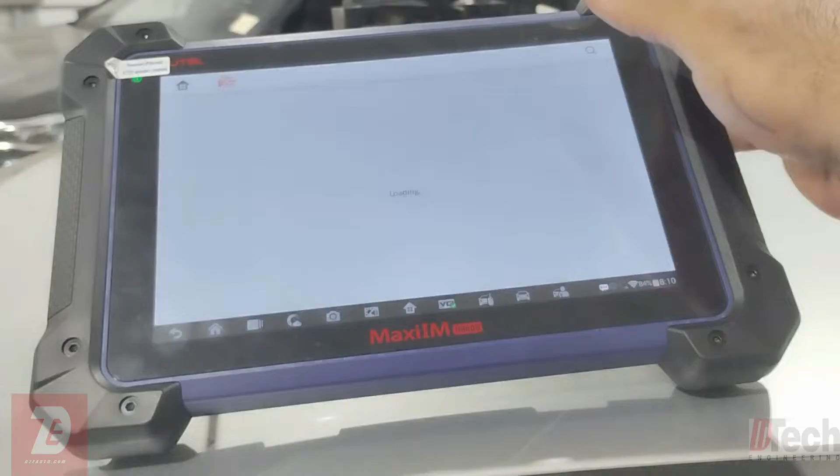Okay, so I'll get you guys going. First things first, I did have to install a brand new battery because, as always, they bring you cars with electrical problems with a dead battery. So we'll start with scanning it, but actually, let me show you exactly what it does. So here's the new fob. It looks pretty legit. Doesn't look, let's call it counterfeit.

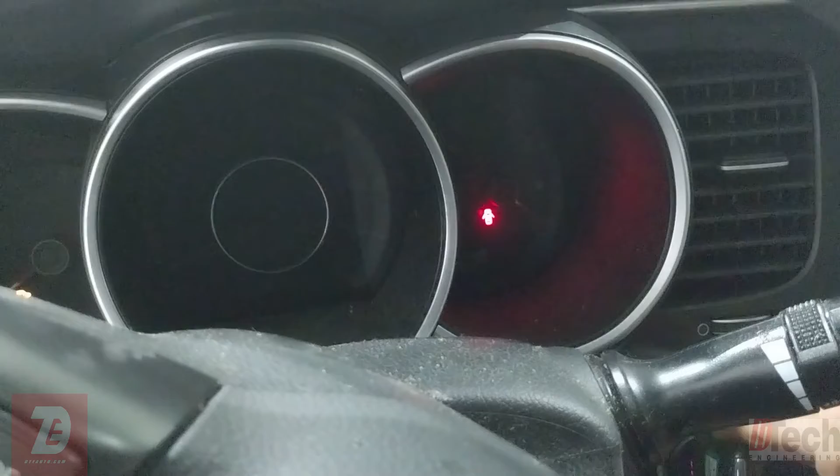And then if I push the button, it'll tell you, so it says key not detected, and obviously we see immobilizer light. Keep pressing, nothing. Again, press start button with key, nothing. If I take the remote and put it there, I'm able to go through the key on procedure. And then if I try to crank it, nothing. It just turns off as if we're requesting to turn off.

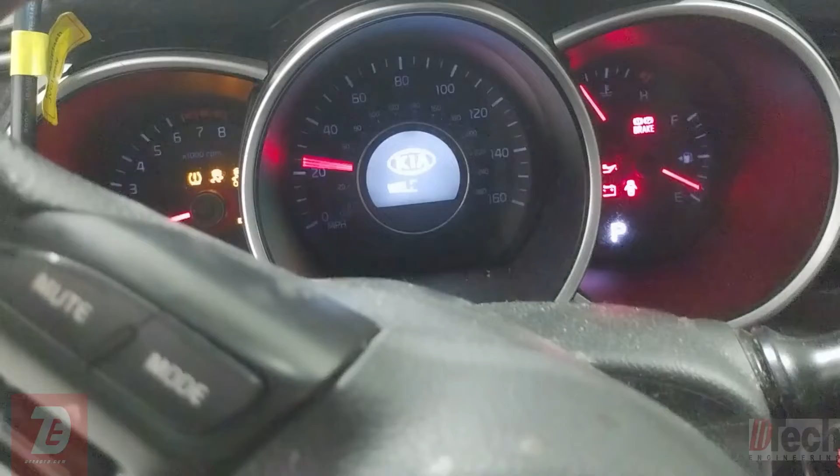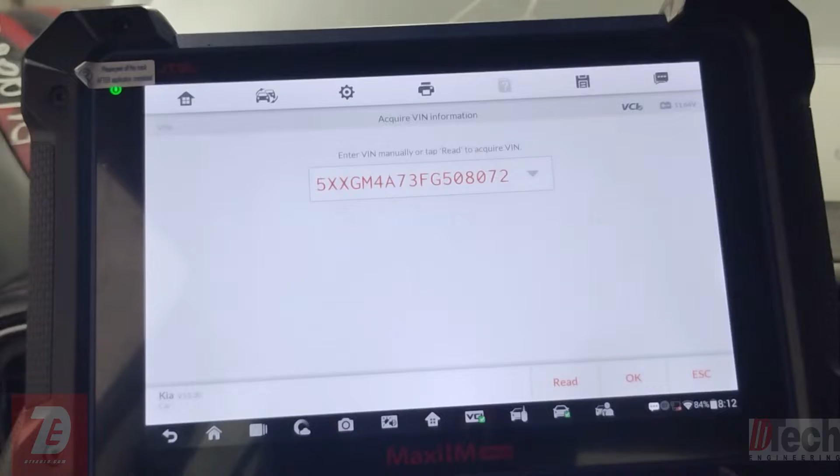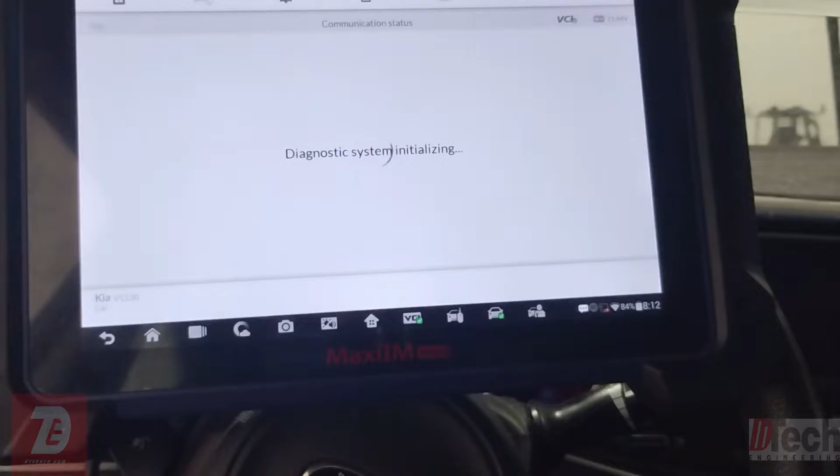So let me get this powered up again. There. And I'll do a system scan. Automatic selection, we hit read. And it is actually the correct VIN. Trust me on that. So it can identify the vehicle, all while still just keyed on, like a normal situation. It just doesn't crank. Diagnosis, and I'm going to do complete scan. That way we can hit all the relevant modules.

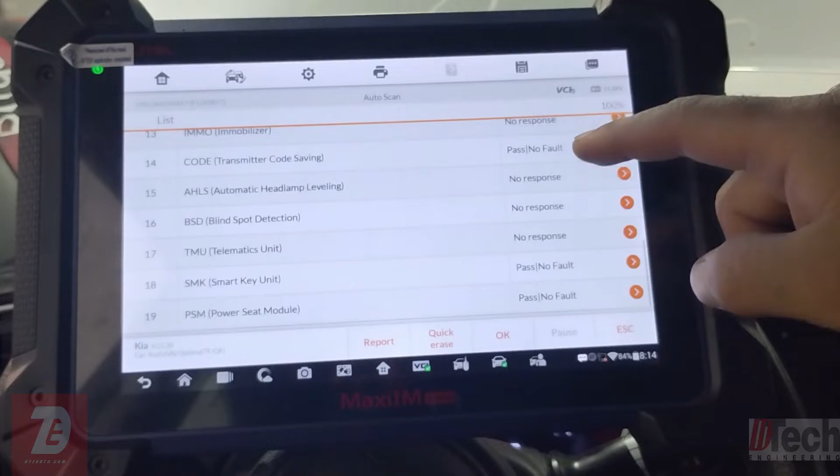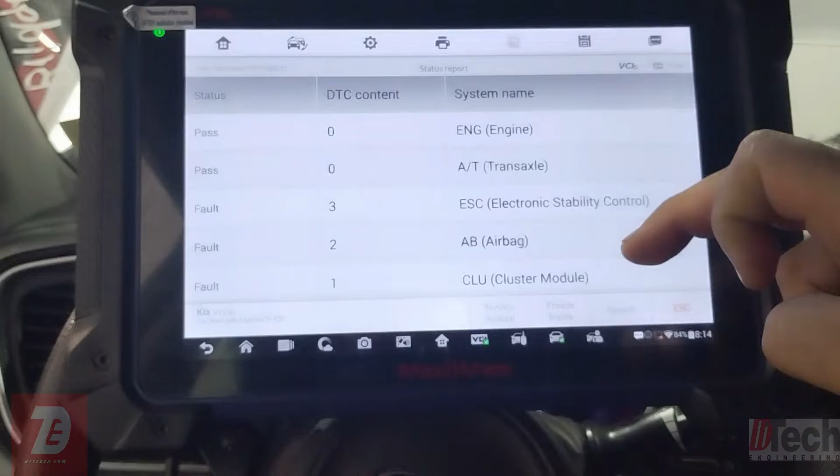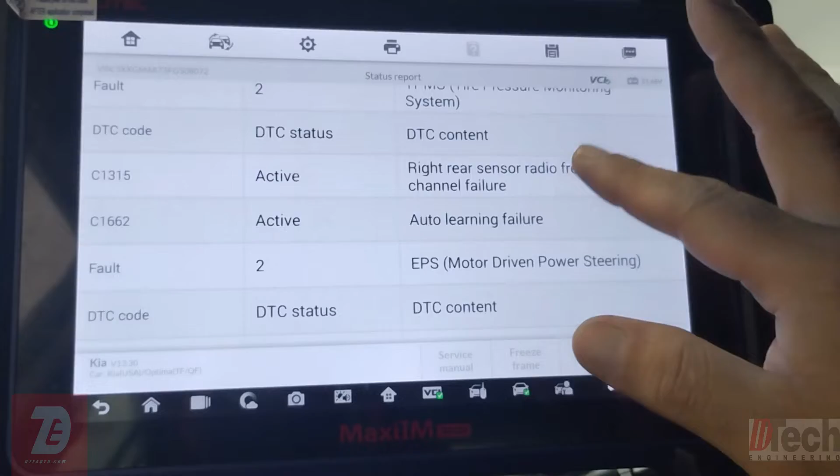All right, so we have completed the whole system scan. Let's see. Here it's telling us immobilizer, no response. Body control module, no fault. Engine, no fault. Let's see the report. So pressure sensor, engine management, history. Got a couple CAN communication faults, but they're not active. Let's see, tire pressure. All right. Nothing here that we see that's relevant other than this immobilizer stating it's not responding.

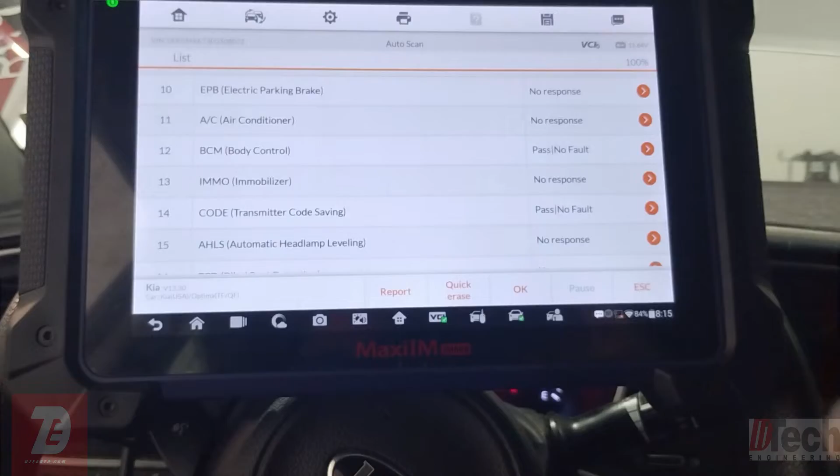And since I've already dove into this about a month ago, that is a module that is not installed in this vehicle, because right away I went searching with that, because clearly that is going to keep us from starting the vehicle if we have no immobilizer communication. But in this case, trust me, there is no immobilizer.

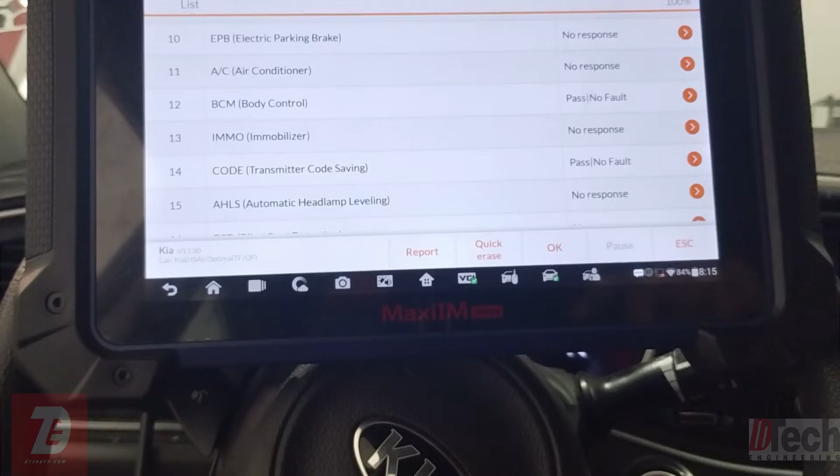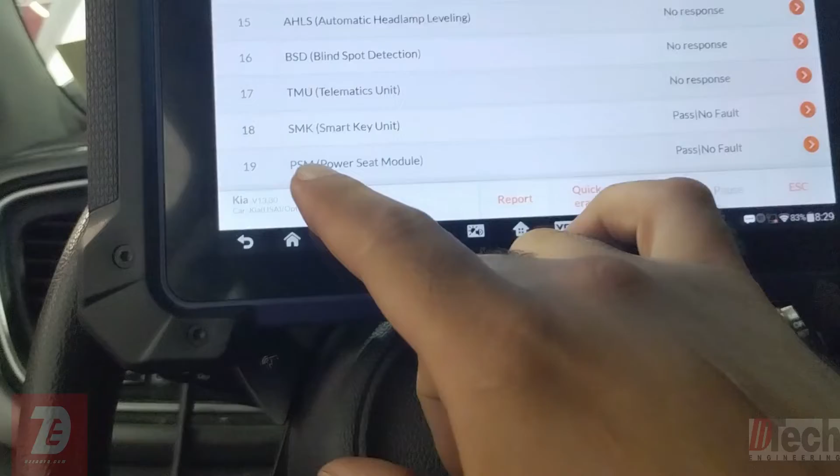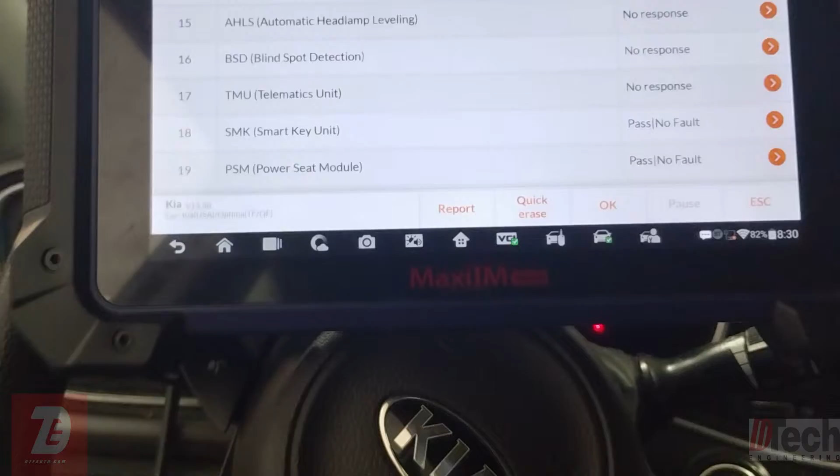Okay, and then so after thinking I had an aha moment with this whole immobilizer not responding, after researching for a bit, I found out that for this smart key fob system, the major player or master is this smart key unit, which, first of all, we do have. Second, we have no faults in it, which starts to get odd because all of our problems are a no key detected situation, and that is the guy that would tattletale any sort of problem with the key. So let's get back to where I was.

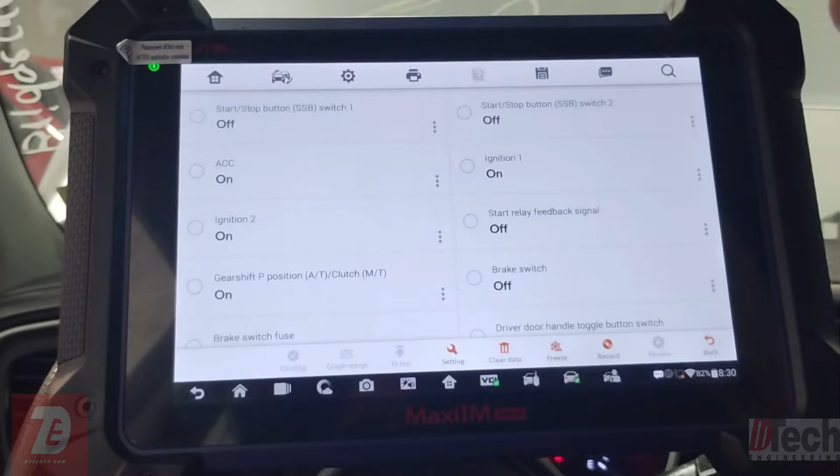Okay, we are powered up and we will look at basically live data. That's where I went next after finding out that is one of the masters. And here we go. So being this is first time dealing with one of these, I am not 100% sure what I am looking for or even what I'm looking at for some of the things. Some are straightforward, but trying to look for something that would jump out.

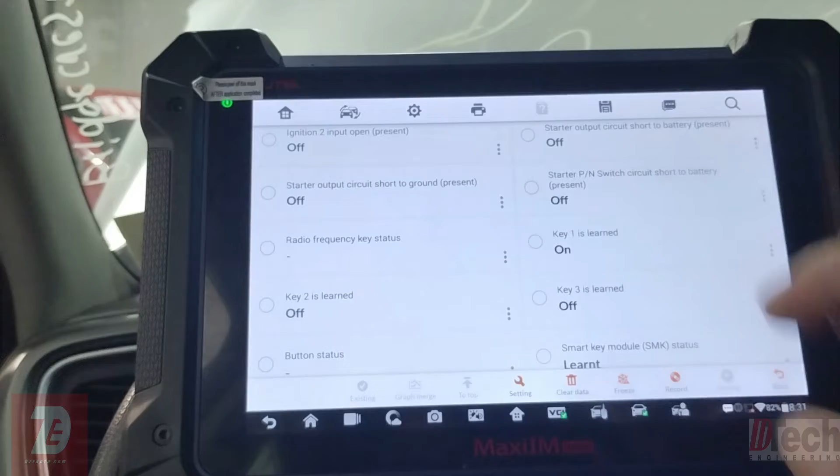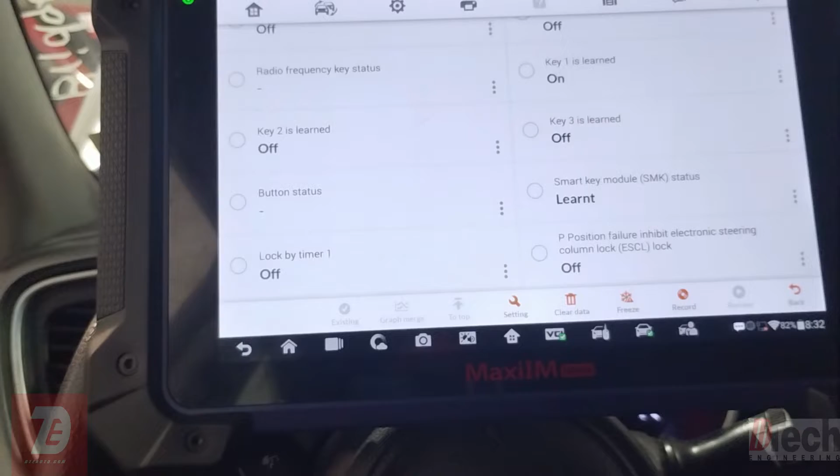And then so I finally get to something that looks to be related with keys. And so that's blank as far as frequency key status. Not sure what's supposed to be there. It does say key 1 is learned. Key 2 looks like it's not. Same with 3. Let's see, button status, blank. Smart key module status, it says it's in a learnt mode. Number of learnt keys, 1.

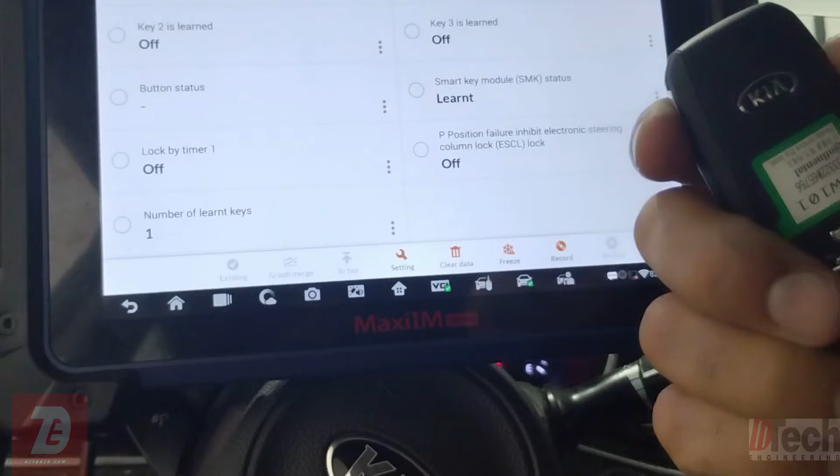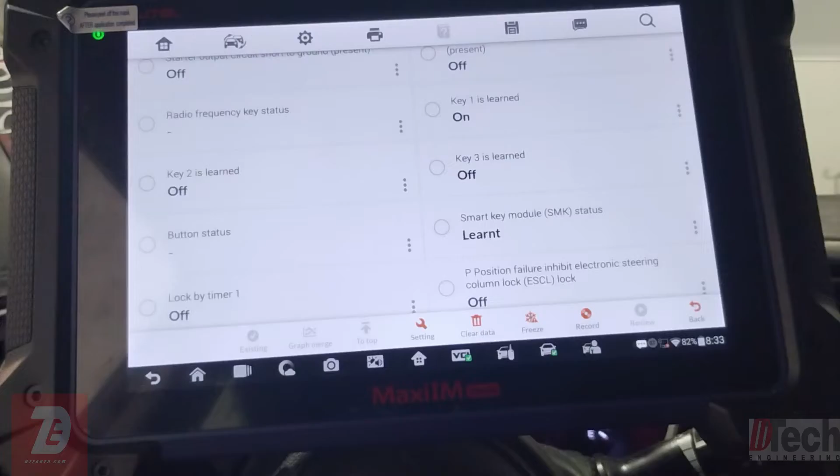Now, I don't know if this is the learnt key, if this is key number 1. But according to just those data PIDs, it again was getting puzzling, because this one you would think would show some sort of problem if we're having, let's call it immobilizer type of issues. And then I'm assuming these two PIDs are related to when you hit this. And you actually could see the light blinking and no status change there.

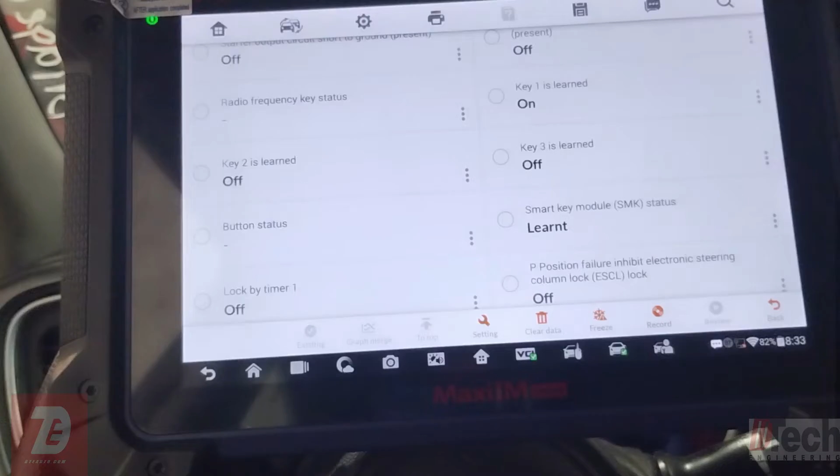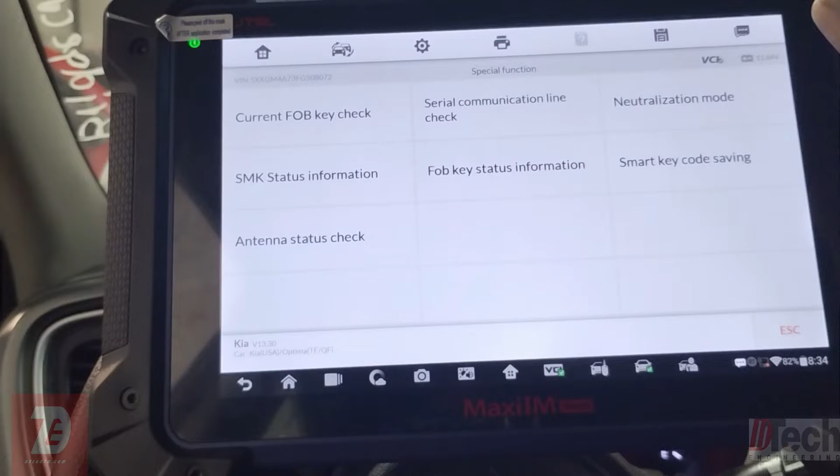And so I'm starting to get lost and not knowing what's going on. And if I back out, let's see. So, let's look at this. Let's see.

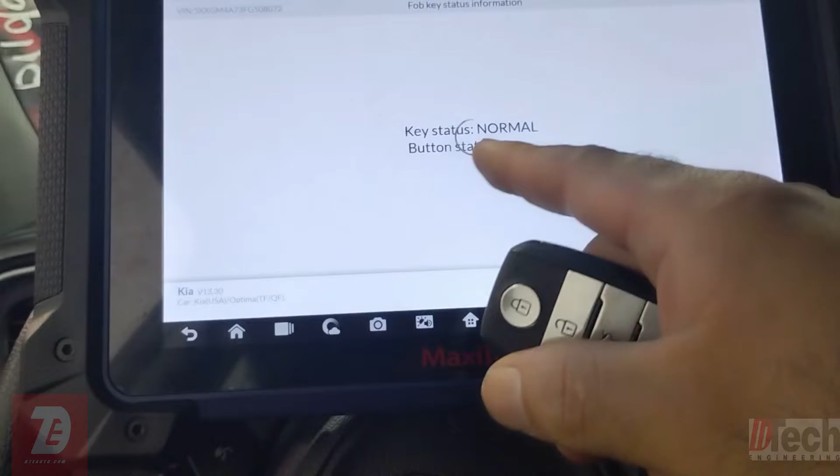So it's saying the status normal. Let's see. It's not seeing any button status. I'm assuming that's what it's asking for. Okay, so we see that seems to have not been good, or obviously it's displaying a failure. At this point, I still don't know exactly what that is referring to.

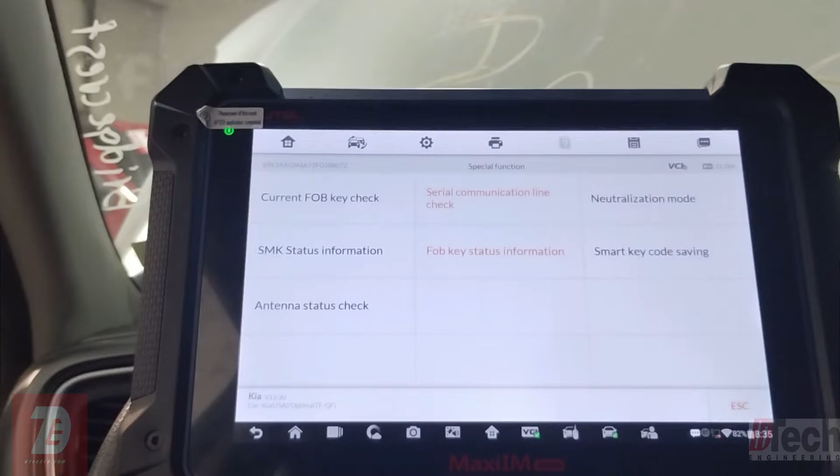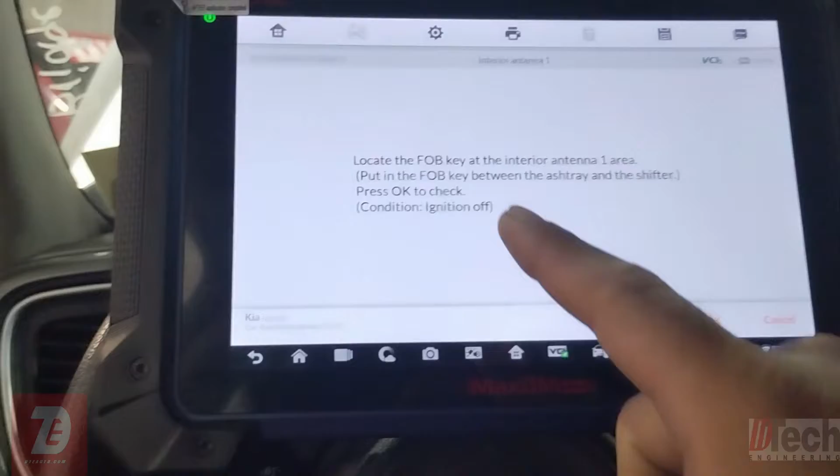One thing that I did see was this. Let's see. We'll do this. So it tells you, put it right here by the shifter, ignition off, which it is. And okay, so another failure. And so those things are just all kind of relating to what the error message on the dash says, that it's not seeing the key.

Now, is it not seeing the key because this just wasn't even programmed, even though it is a brand new key? Did someone just get in here and attempt to program it, never go through, and leave this fob in here when the car got sold? Or is it programmed some way, somehow? Not sure how. If it can't even be detected, how you'd be able to program it unless there's a different way. I'm not sure because I've obviously not done any keys on one of these, so I don't know if this one's programmed or if it's just a blank and why we're not seeing it.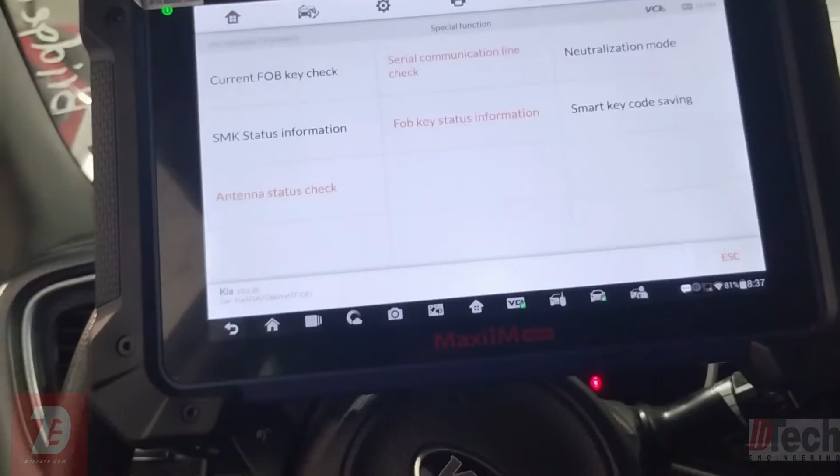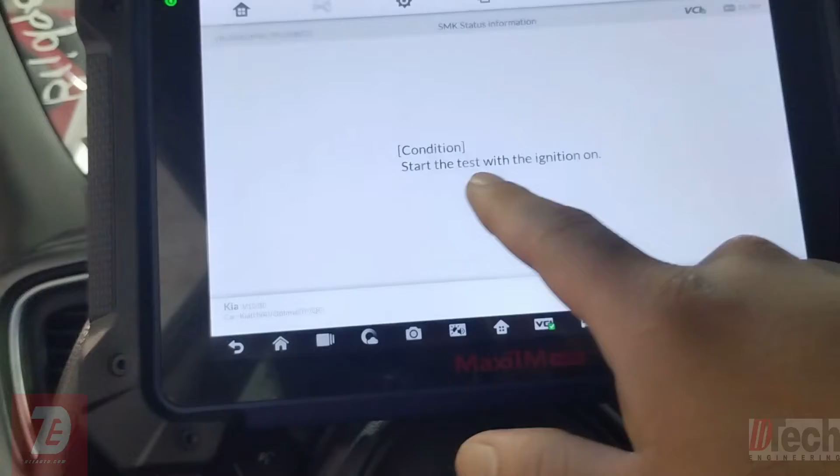And then, one last thing I could check. So that's a SMK, which is the smart key module. So ignition on. And one thing I've noticed, I have to put this in up against that for it to, looks like it can at least see it that way. So there's something in here that is able to sort of communicate with this. So that's confusing in a way.

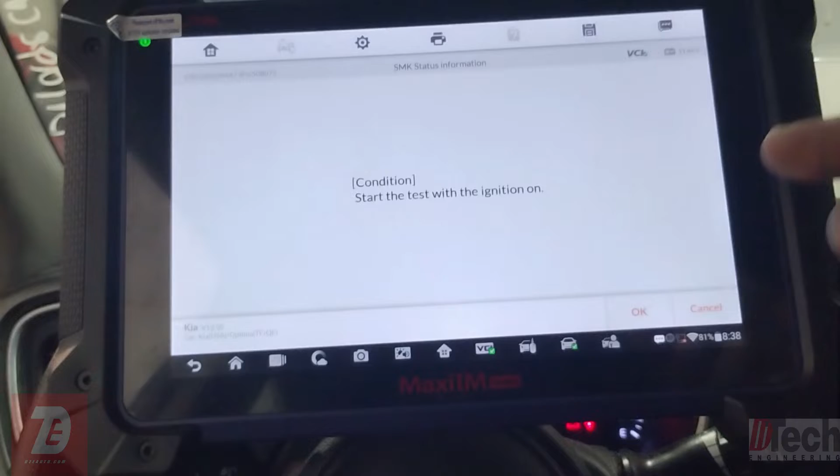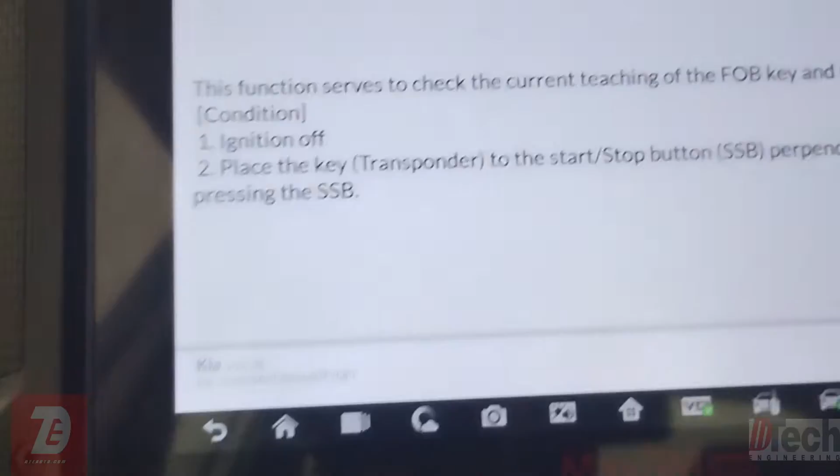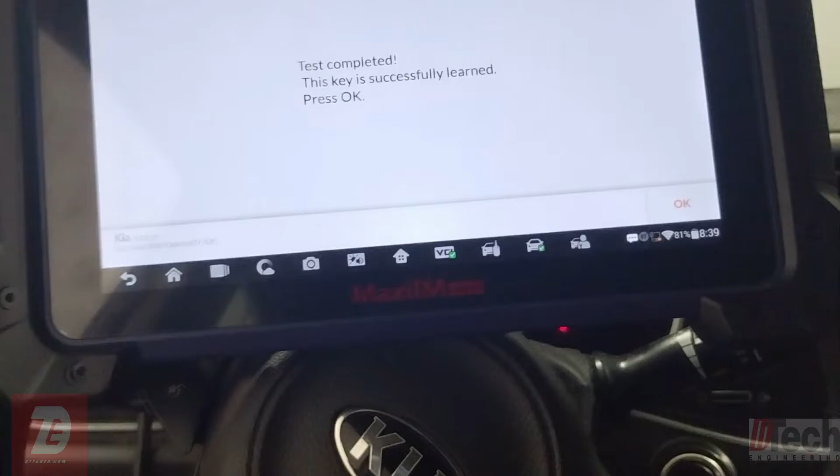Supposedly, this test we just ran, where I put this on the push button, supposedly tells us that this is learned. So if this is learned, and the status tells us that there is a learned key, and this test here supposedly sees that it's learned, why can't we start the car? Again, I can press, my foot is on the brake. And nothing, no start, even if this is supposedly a learned key.

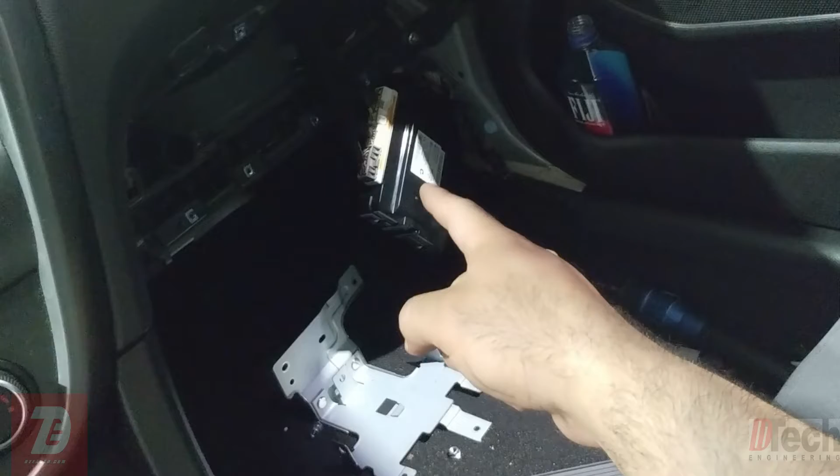And so this guy, that is the SMK, the main controller with the system for the key. And I'm beginning to fear that that is probably a possibility of what's wrong. And why I say fear is because I don't know what's going to be involved with doing a, let's call it a used one at first. Not sure if a new one can be purchased or available, so on and so forth. So I don't know if I'll even have the tooling to do a used one or what would be involved. So at this point, I decided to do some more research, and I'll show you what I found.

Now, if you remember, when I was doing the active test and looking at the data on the scanner, I think it was 2 tests that basically came back with a failure result. One of them was the communication line. The other was the antenna test. So those 2 are starting to tie into something basically similar.

The third thing that I keep noticing is anytime you push a button, there's no status change of seeing or recognizing any buttons. So basically, I think what we are dealing with is not an actual key problem. It seems that the key is properly learned, but we are literally dealing with what the dash is saying, and that is that it cannot see the key. So now what we have to figure out is why the vehicle can't see the wireless radio frequency communication from the smart key fob.

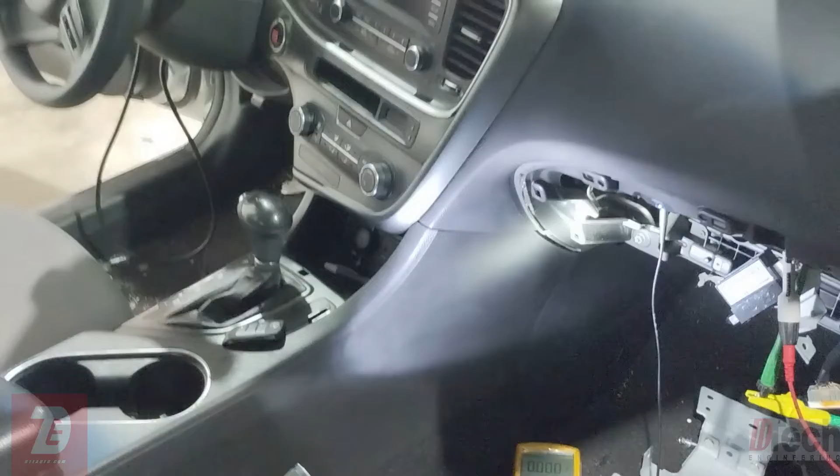Okay, so I've gained access to the antenna module there, and I am monitoring power, ground, and the signal. And right now, key is off. And just to check and see what levels we have. So the red is the voltage on the ground. I just wanted to make sure nothing crazy was there. That's down at 0. The blue is the power feed. That's up to near 12. And the green is the signal line. That's in the high 11. So I'm going to key it up and see if that changes. Let's see.

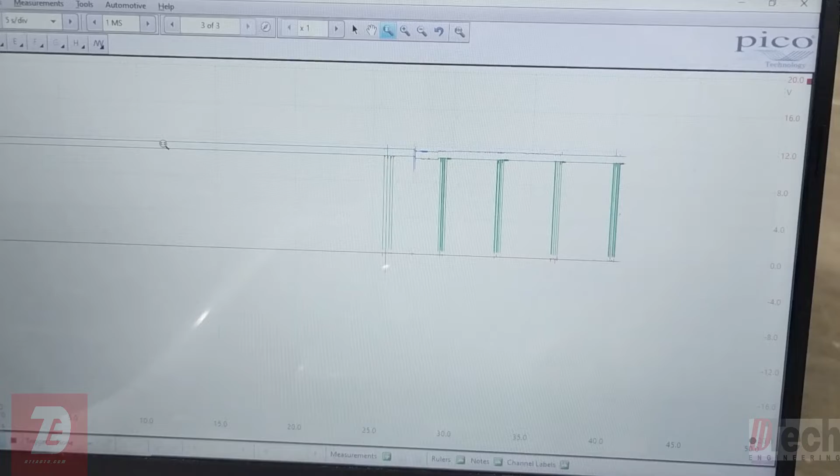Okay. Key is up, and we are getting signal activity on the communication signal line. So that's very repetitive. But I don't know necessarily what's supposed to be there.

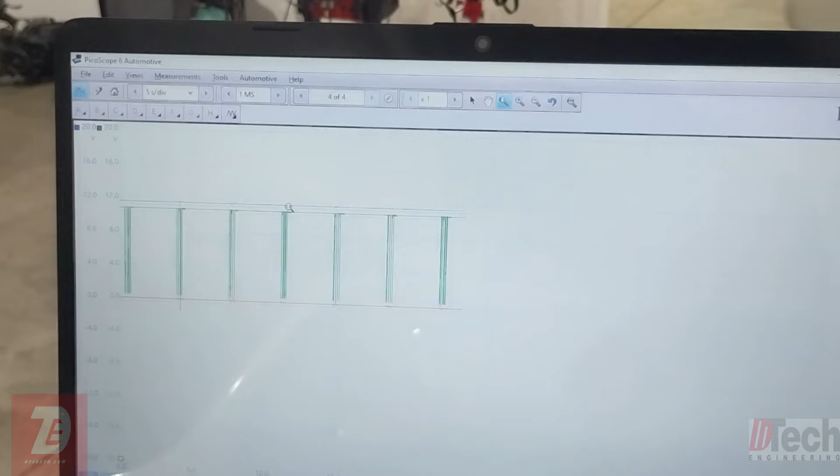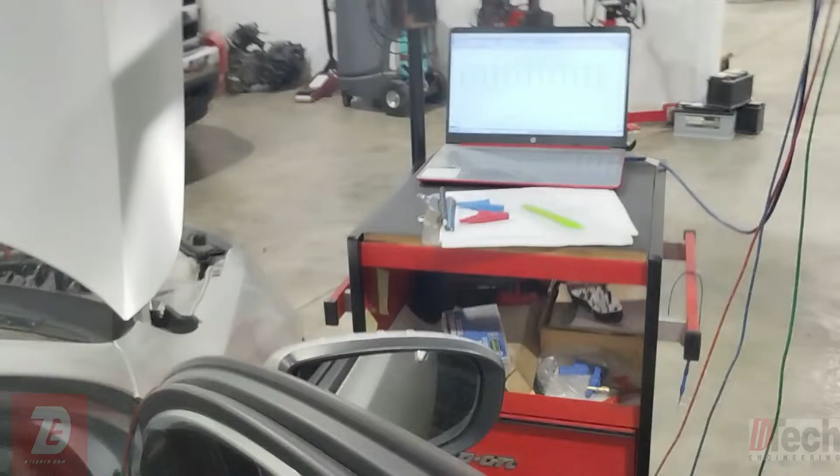If that's a communication that occurs constantly between the SMK and the RF, or if it's supposed to be stagnant and then only show activity when there is communication from sending or receiving radio frequency. Based off that, let me see if hitting the button does anything different. So let's see. Nothing different. Nothing.

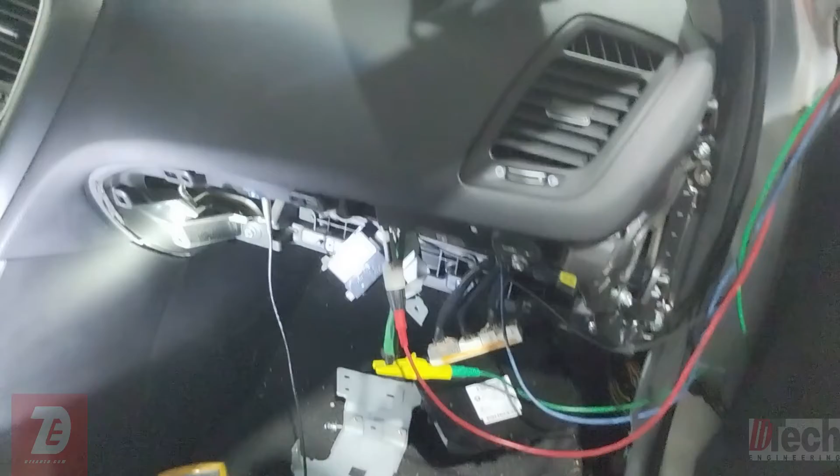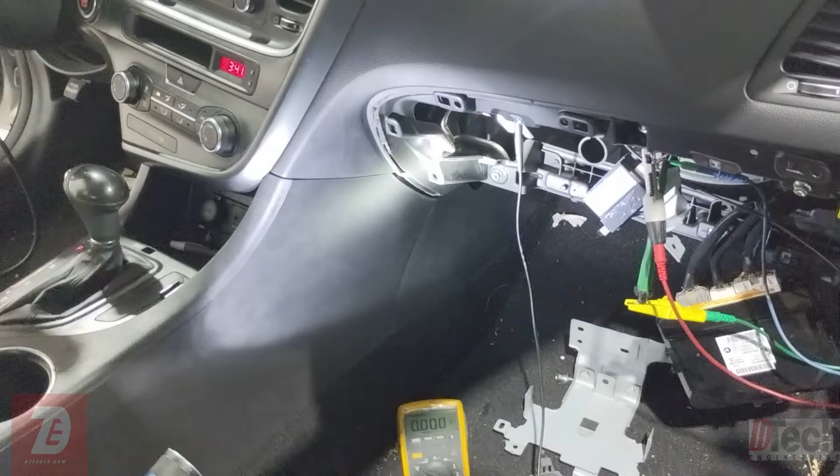So I don't know what's supposed to be there on that communication line, but I am theorizing that this receiver is not working, that the whole vehicle, that main module, everything is not seeing the response from the key fob, and it's not seeing it because I believe that guy is non-responsive. Based off everything that I've been reading and just experience with other vehicles, systems like this, and kind of a gut feeling, I'm narrowing down to that, but I need a way to prove it out.

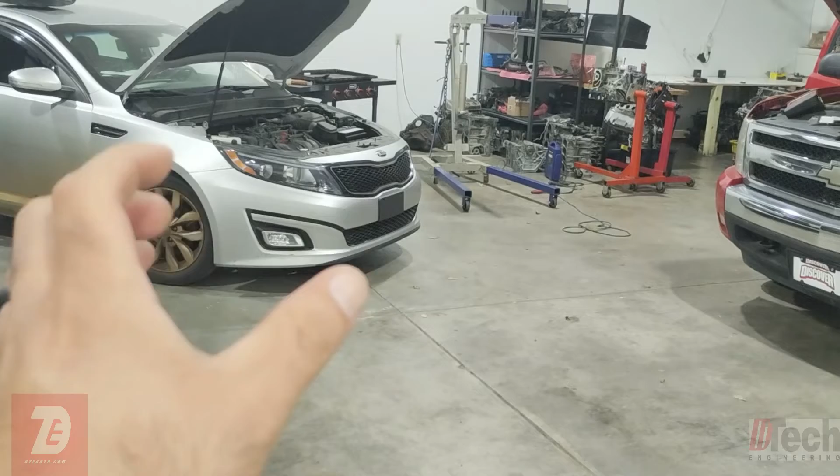Okay guys, so I finally got lucky. It's been a while since I actually messed around with this one because part of the problem was trying to wait for one that had the same start system, basically a bladeless key, one of those remote hands-free type of key system in the same general year range to be able to do back-to-back testing. So here I am with that.

I am connecting the scope to the same antenna. So this is actually a 13, but I checked the wiring and the system, and everything is pretty much similar. That signal does go to a different pin on the main SMK module, the smart key module, but it still nonetheless is the same antenna setup, and the concept and operation is the same. I did read both vehicles' description and operation for the system, and it was the same.

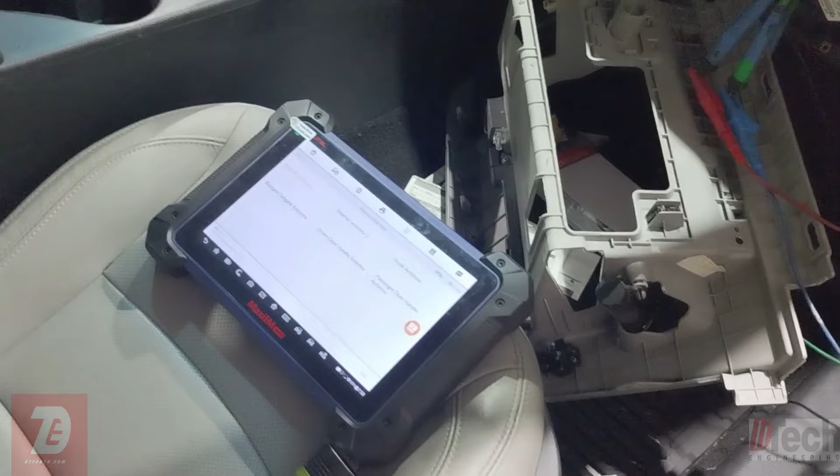So the one thing I want to try that has made me think that the problem is the receiver, is to do the test of detecting the key with interior antennas. So you can see that one that I've got highlighted. That's the one with the antenna up there up front. As far as what I am monitoring, channel A in blue is the power supply. Red is the voltage on the ground. And then green, I am monitoring the signal line that goes back to the smart key module.

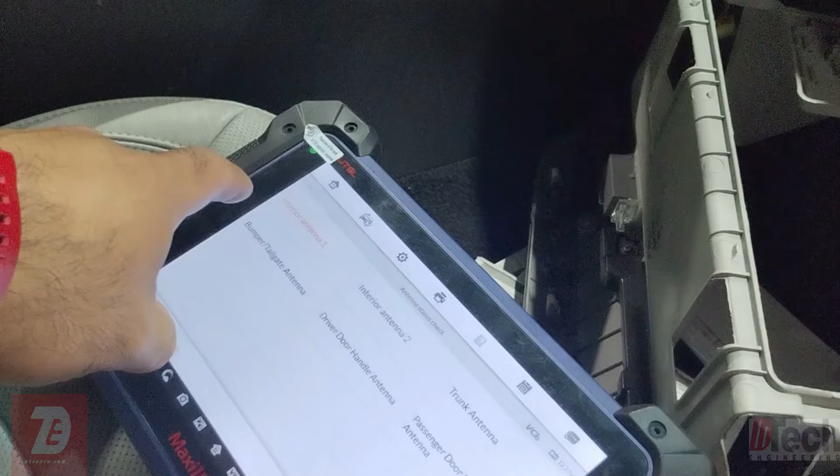So I am expecting to see some sort of activity on the green channel when we request the antenna to find the key. So we'll do that. And we'll quickly take a look there. It's all flatline. We'll hit OK. And it passed, and look at that. We have activity on the green signal line.

Okay, so now we see a difference between this known good vehicle, which works right and is properly starting with the wireless remote, and we see a difference in that communication line, that it stays constant up high, and there's only activity when there is radio frequency being transmitted when we did that antenna test. So that is one more step in helping prove out that we have some sort of issue on that communication line. And I believe that it's just a dead RF antenna not receiving things and sending it down. And I think that constant pinging that we saw in the bad car is just the SMK reaching out because it's not seeing the RF antenna.

And just to further prove it out, I'm going to move that RF antenna into this vehicle and see if this one now does not see the key. Okay, so here's the bad one. I've marked it with an X. I haven't installed it yet, but I got the scope back on here. There is our scope running, all same channels.

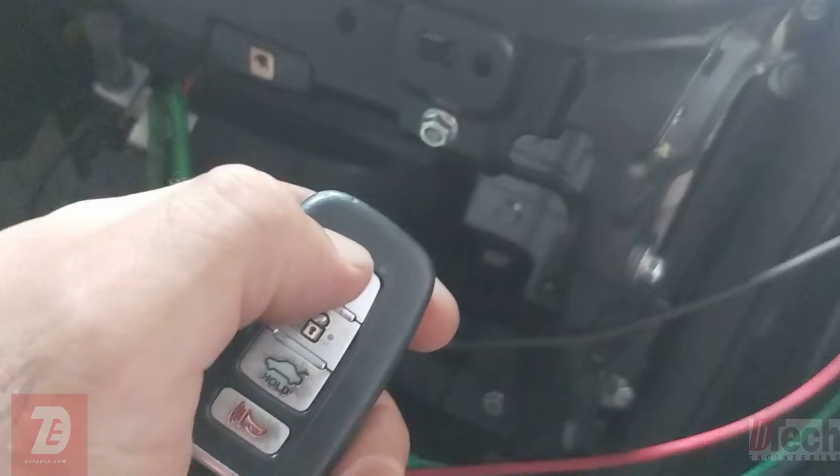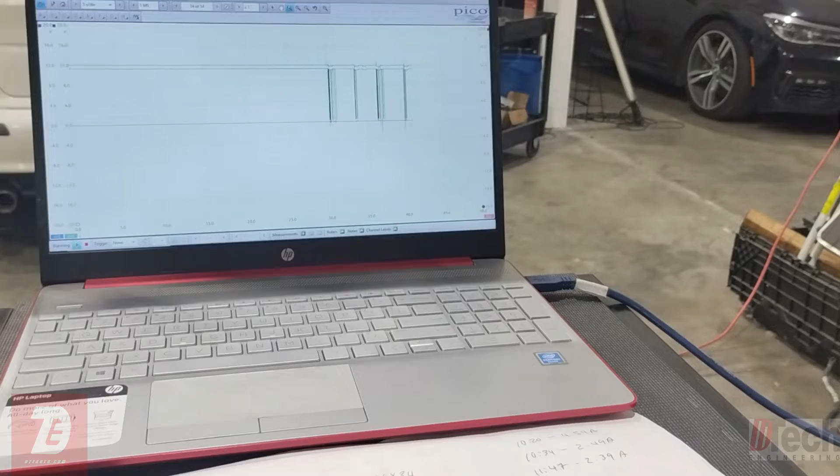I wanted to show you if I hit the button, we should get activity on that signal line because this will receive the message from this and it'll react and send it down. So let's see if we can capture this. Let's hit. There we go. Look. So let's unlock it. There we go. So that is what a known good should look like. Kind of like what I was hoping to see. It's similar to the BMWs I've done.

So this is a receiver of radio frequency from the remote. And it also, as we saw, receives it from all the antennas. So the antennas get current from the main module. It's an inductive current, and they'll pick up the key and send that frequency information, because it's a change in frequency. It sends it to this RF wirelessly. This picks it up and then sends it down.

So that's how this whole system works. Now there has to be a separate main, possibly a backup antenna, like in the literature, but this must be an inductive coil like most regular immobilizer systems are, and this will energize and send frequency to this guy when it's up close in order for these two to communicate right there.

That's communication only between the fob and this coil here, which I believe is how the other key in the other car was able to be learnt, because it could still communicate, and I'm wondering if the process to do that is by placing it close to here, and it picks up the frequency and it writes the info, so on and so forth, and so you could learn the key there.

But for anything past that, key cycling, because this will do your key cycling, anything past that, it looks like it still has to go wirelessly from here to this antenna, and then from there to the SMK. So I think that's what's going on, and obviously we've kind of proven it out. But the thing that was weird was how you could still get operation there, but that's due to that guy there. So lastly, let's help prove out and install the faulty one.

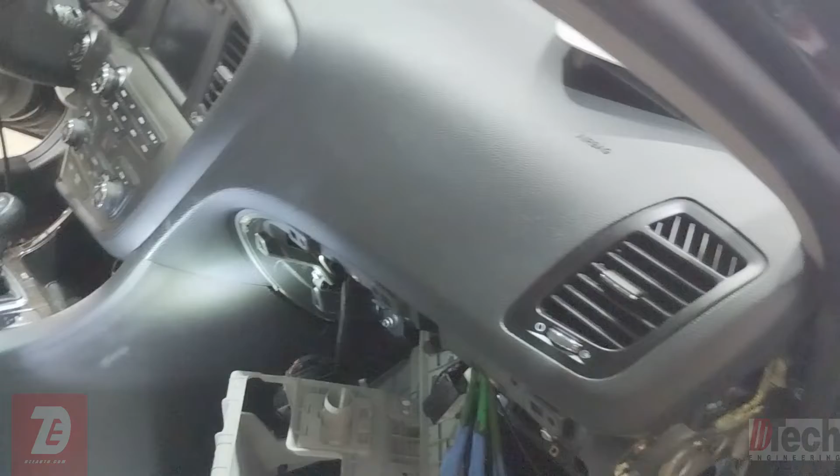Okay, so I've got that one off and the bad one's installed. So again, this one, no X on it. This is the bad one there. So first we can do our key remote test. So there we go. Nothing picked up wirelessly. And we probably don't even have to go through that scanner, since I think that is just enough evidence.

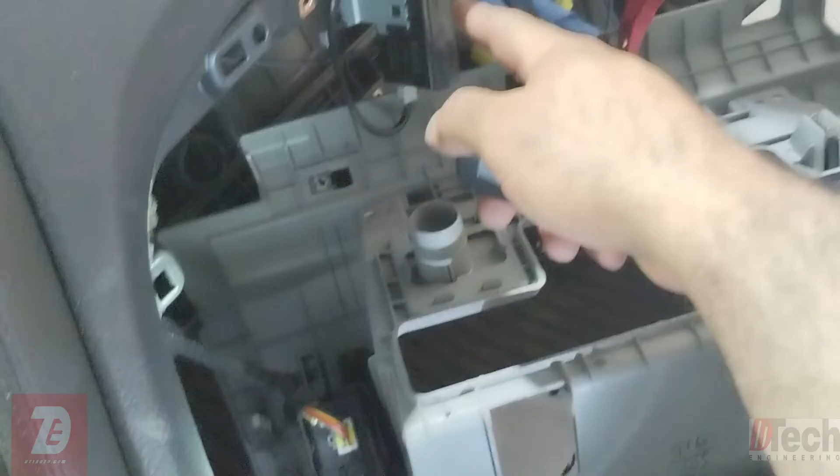So again, we'll try, and basically key not detected, immobilizer. This one does have a message to insert the key. It has a backup, basically, key slot, which I don't understand why the newer one, this is a '13, the newer one does not have that. So for whatever reason, this one was set up with that. But again, we're not seeing this in the main module because this guy is dead and not able to receive any radio frequency.

Now, even though I am 100% on my theory, confirming my theory, and accurately diagnosed, I would like to install this in the bad car. And part of me doesn't want to, has that gut feeling of I'm going to mess this one up. And now this customer is going to be stuck not starting. But I'm very, very tempted because I checked voltages and everything, and they're both the same, both cars.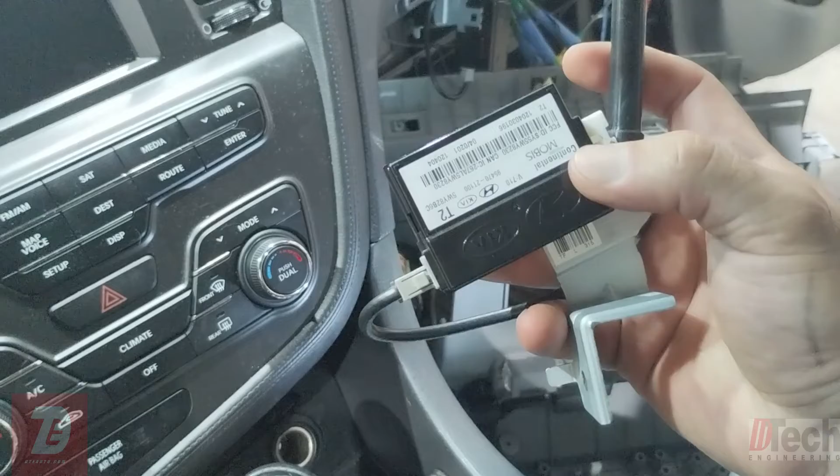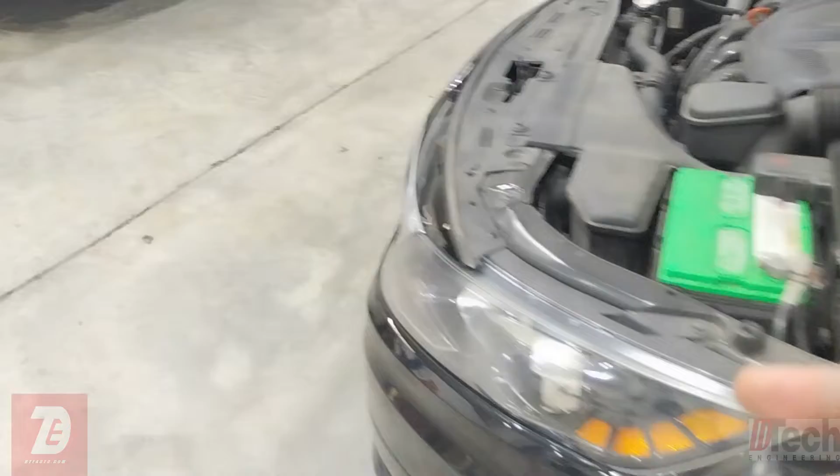And literature tells us this has no play as far as authentication or deciphering any encryption, so on and so forth. It literally just tells you it's a high-tech device that transfers the frequency. So I'm really tempted, but I'm hesitant. I hope I don't make a mistake. Reluctantly, I'm trying it actually, so it's plugged in. Let's see.

Oh man, that's awesome. So if it's still reacting, we haven't killed it or burnt it. It's all voltages for signals. Now we get to see if the engine is locked up or knocking.

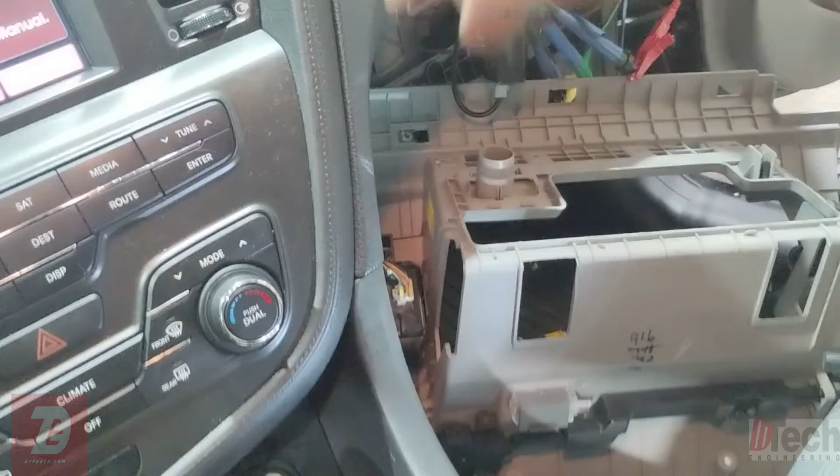I brought it back after you saw it wasn't reacting. Okay. So, I don't know what's going on over there. Let's make sure. All right, perfect. I think. Okay, so something is going on over there where I don't know. Is the car or something killing this? We saw it temporarily kind of knock that out, but it's still alive.

Okay, so for right now, because I am still able to start that, I don't know what happened over there. Something's going on, but I don't want to keep messing with this one. As of right now, I am 100% sure that the antenna, the RF antenna, is messed up. Now, if I would have left it longer in there and maybe cycled or reset something, I don't know. But I don't want to keep messing right now until I get a spare one that I can dedicate to that and not off of a known good customer's car.

So for right now, at least we know that's part of the problem. If it's the whole problem, I don't know. But I'm stopping for right now, and I'll get one of those modules coming.

Okay, so I'm picking back up. This is another day. The other vehicle has come and gone, put back together. I think last when I left off, it started working with the locks. Then I went over to attempt to crank and start the car, and nothing happened. Even right after then, I hit the remote, and I didn't get any lock actuation. Now, I don't know if I didn't hit it correctly enough on the remote, because right away, I took the antenna back out, took it over to the good car, and tried it out, and it started working with the remote and starting the car.

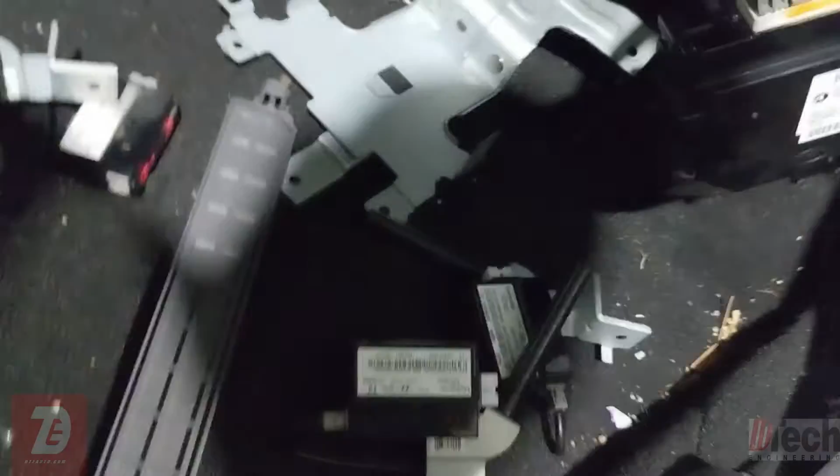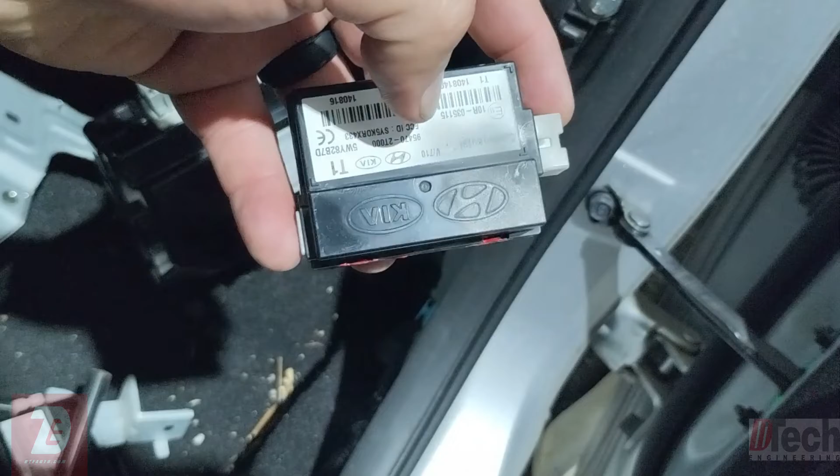And so here we are. Here's the pile of modules I've gathered. This one is the original. If you remember, I marked it with an X to denote that it's from the faulted vehicle. We'll keep that aside. This is one I ordered online, and surprisingly or not, this one does not work. It does nothing. That's why I, on my own, went and picked up 2 extra ones from the local yard, and I will show you what these do.

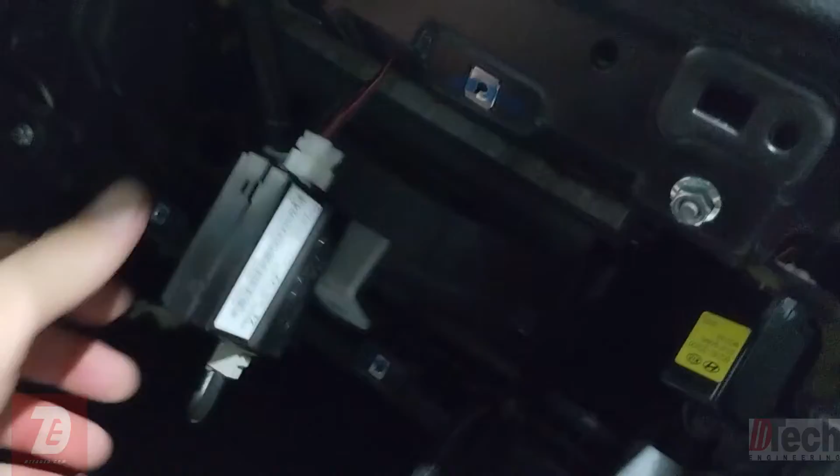So, try to get this plugged in with one hand. Okay. And here is the key right away. So this one works, and I've tried this one already. This one works as well. These 2 we'll keep off to the side. We know, again, we've figured out a problem. Now to go and start it.

Oh, I'll get in. I'll actually close the door. Simulate. I'll press the brake and, okay, right away. I don't have to have the key up against this antenna, and the vehicle's dash is not displaying a message saying it can't find the key. I am pressing the brake, pressing the key. The key is being seen, but the starter is not being actuated. So we'll turn it off.

Goodbye. We'll simulate getting out. We'll recycle as if coming in. Foot on brake. Key. And nothing. So now, and just to show you, okay, so maybe it's because I had the key on. So let's turn the key off. All right, that's what must have happened before. I kind of panicked probably and hit these buttons while the key was still on, meaning the position 2.

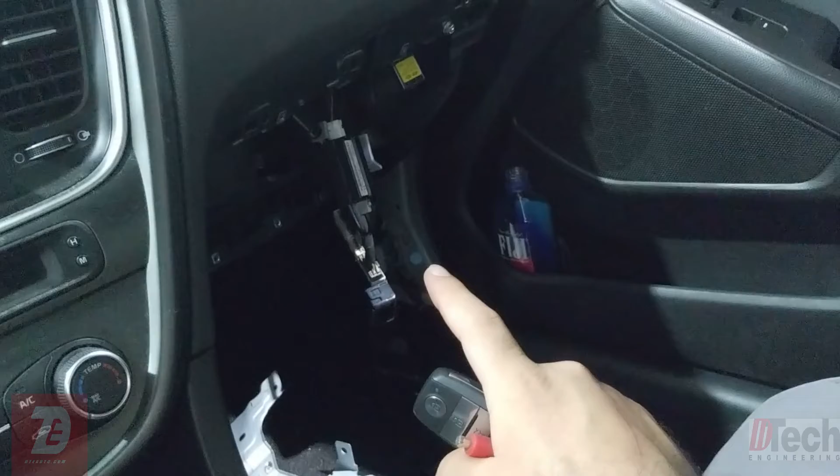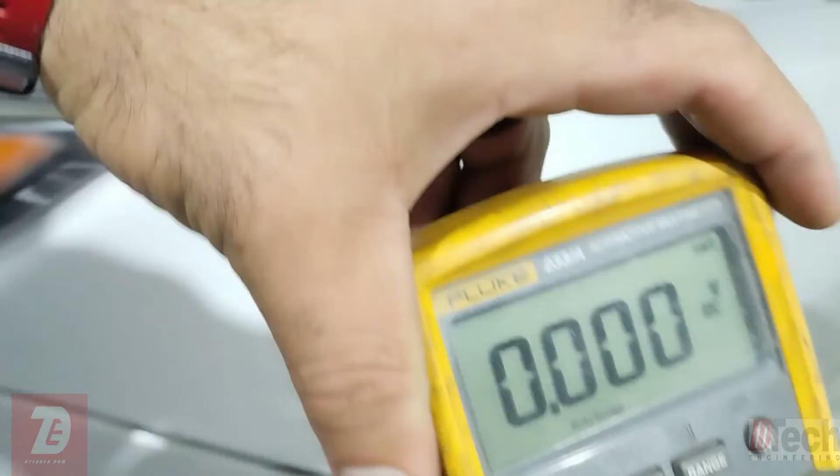So again, the antenna, the RF receiver now is picking up our signal. We just do not have starter operation. So now I want to take a look and see why the starter is not kicking out. And another surprising hurdle on this vehicle. So what I've got going on, I've got the meter hooked up down there to the starter feed. And I'll show you what we got.

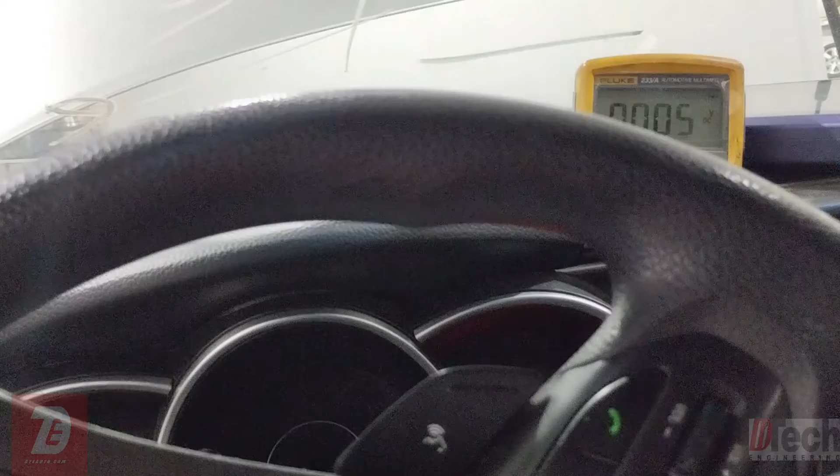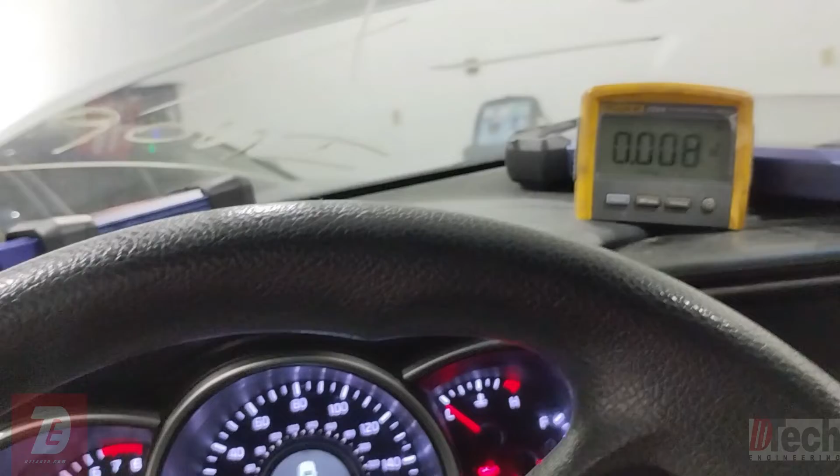So let's watch the meter. Obviously we need voltage to get fed. Let's see, I should put it down there. I'm gonna hit the key. So we'll watch the meter. Okay, so we're getting voltage down there at the starter. It's being held, and then it will cut it off on its own. There you go. So again, we'll do it again. There we go. So it's feeding voltage down to the starter.

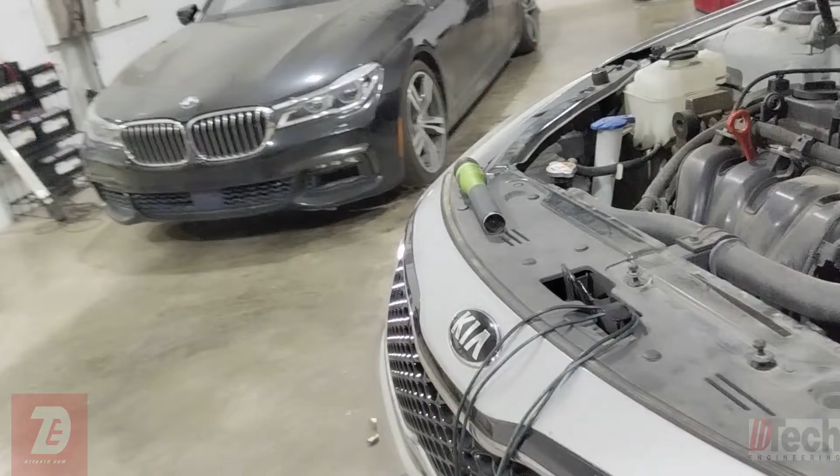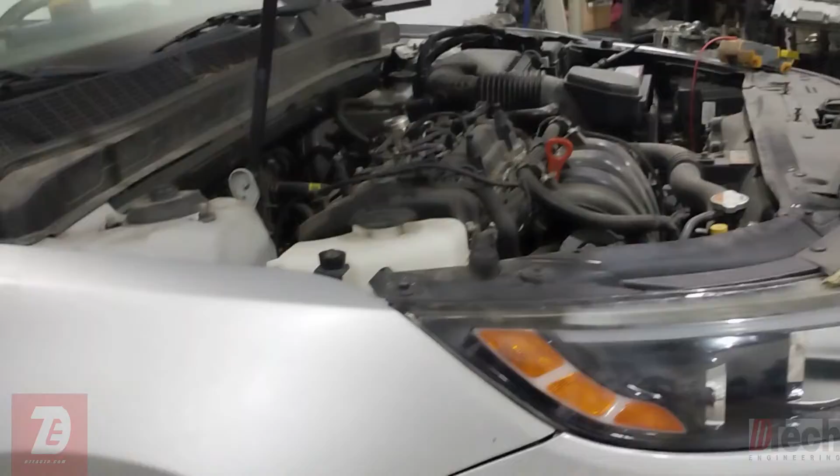Obviously, you guys saw me figure all of that out, get the key being recognized. We have the locks working. We actually have voltage now being fed to the starter because it is seeing the key. Only to find out that actually the starter is dead because probably they kept trying to crank it with a locked up motor, cooked the starter, engine is messed up. All this to find that out, which, yeah, I probably in the beginning could have simply checked to see if it was locked up. It sort of crossed my mind when it was dropped off because of the whole key deal, but the guy still wanted me to get the key working or find out what was going on, and that's why I went down that route.

So I'm done with this one. I learned a lot. It was cool, the whole diagnostic process and finding out that little antenna deal was not letting the key be seen. But besides that, yeah, it's frustrating, it's crappy, but all I can do is give the customer the news, let them know what it is, and still charge them for some diagnostic time and parts. So I don't know, that's it.